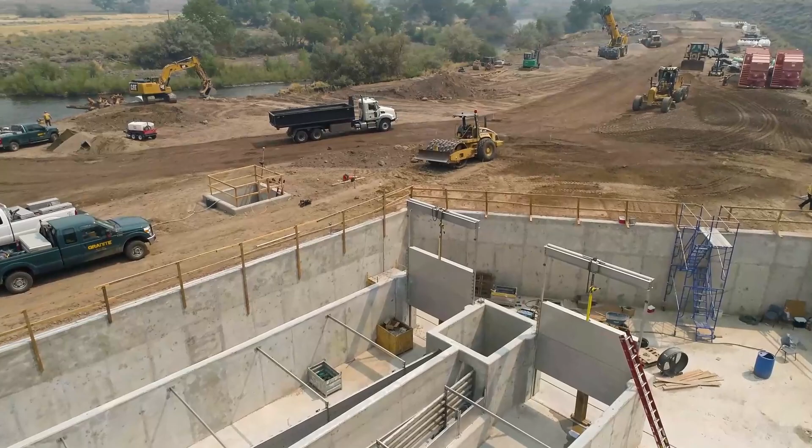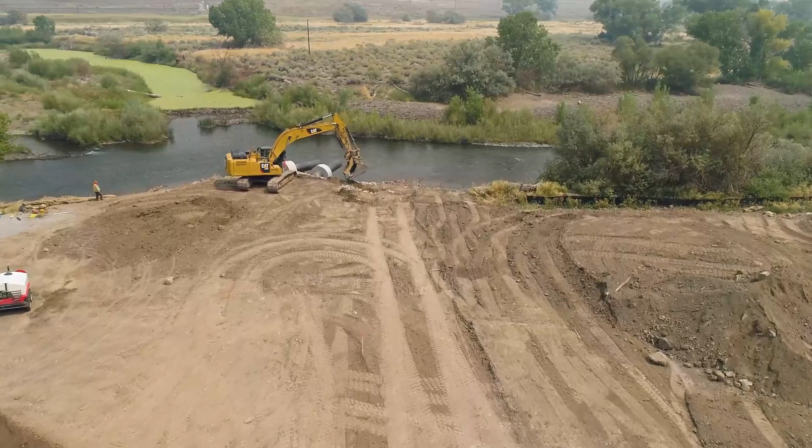Thank you for taking the time to watch Granite Construction's Safety and Environmental Policy Introduction video for subcontractors. In order to strengthen our commitment to safety, sustainability, and environmental integrity, this video will highlight how each and every one of us can do our part. This presentation will focus on the various environmental and safety procedures that you will be required to follow while on a Granite job site. If you have any questions about the presentation or the content, please contact Granite Construction's project management team.

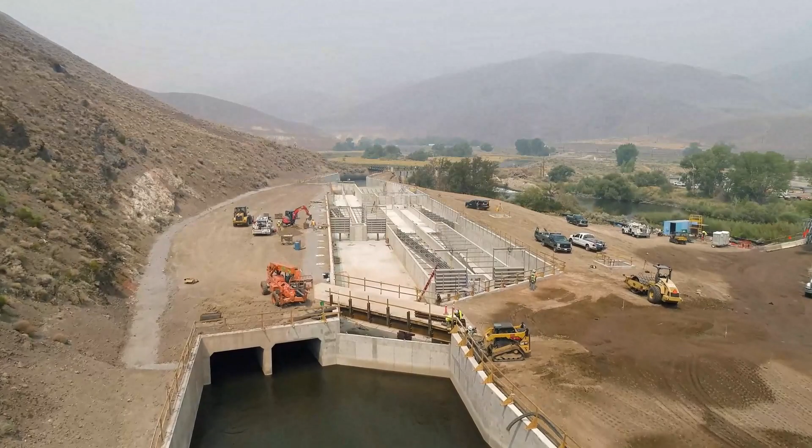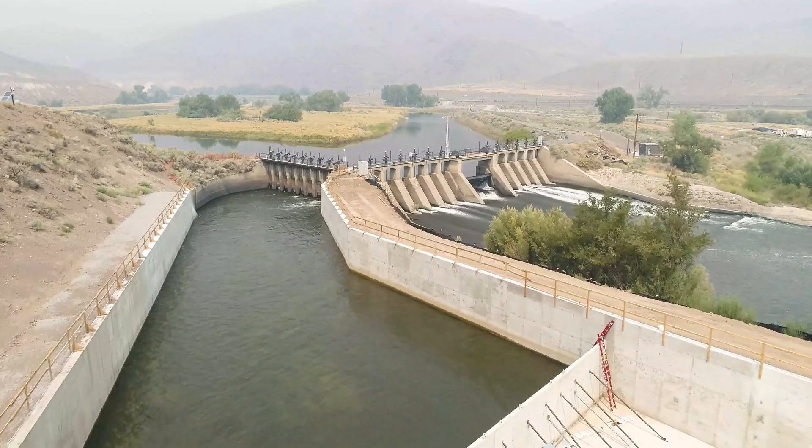Granite's Safety, Health, Environmental, and Quality Policy, also known as SHEQ, embodies our commitment to industry leadership by providing a safe workplace for employees and subcontractors, delivering on our environmental responsibilities, and providing quality products and services to our customers and the community. If you are unfamiliar or have questions about this policy, please take the time after this presentation to reach out to Granite's project team, as these standards represent Granite's core values.

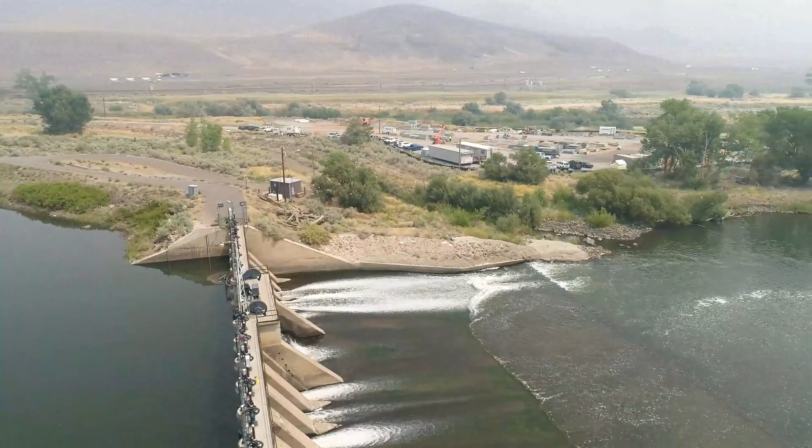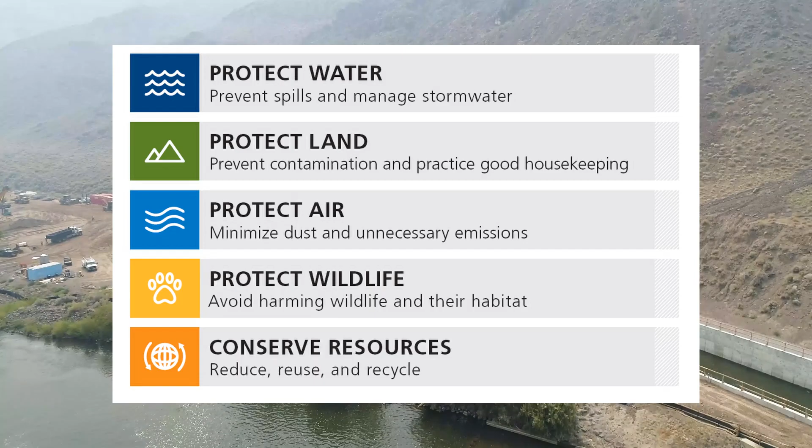All projects adhere to the Keep Granite Green policy to help identify and protect elements of the environment for which we can impact through our work activities. This video will focus on Granite's 5 environmental aspects: protecting water quality, protecting land, protecting air quality, protecting wildlife, and conservation of resources. If you are unfamiliar or have questions about this policy, please take time after this presentation to reach out to Granite's team.

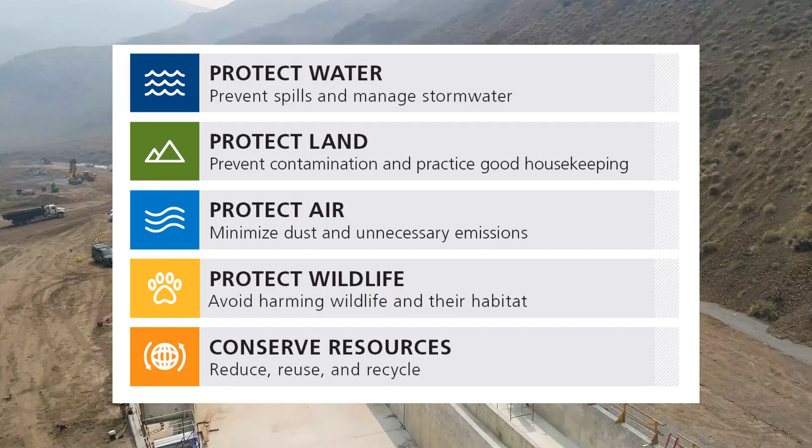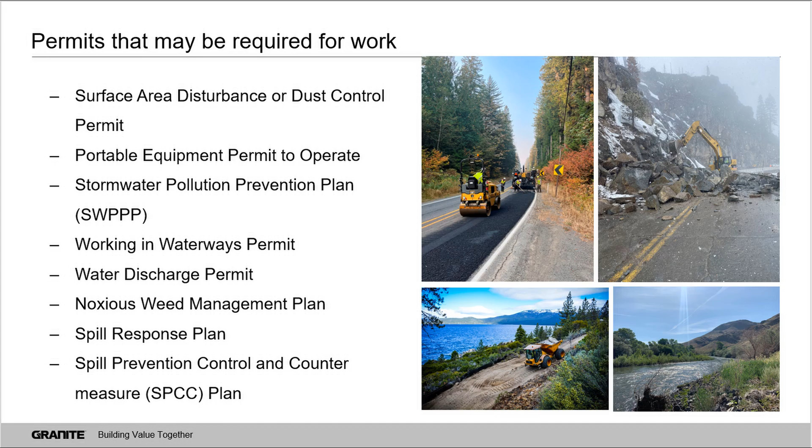Granite has various permits and plans issued by federal and local environmental regulatory agencies. These permits outline the requirements the site must comply with to prevent the potential negative impact a construction site could have on our environment. These permits and plans include, but are not limited to, all permits and plans that are required for the project are there to protect our environment. Ask the Granite project team about permits and plans that are specific to your project.

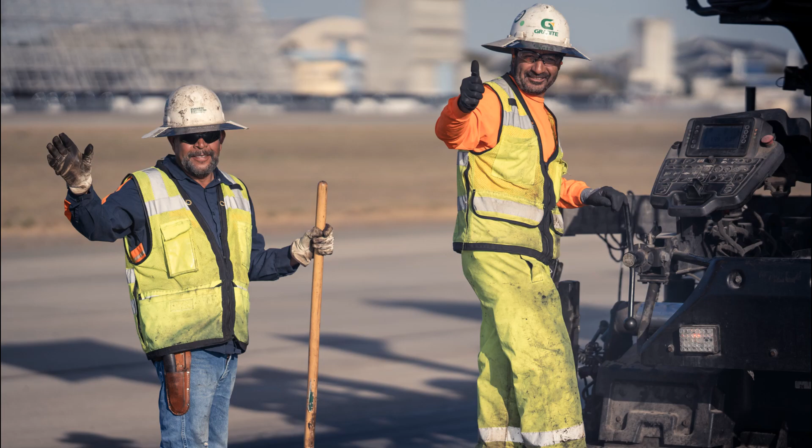Immediately notify Granite if a safety or environmental regulatory inspector arrives on the project. We ask that you please wait with the inspector until a Granite project member has taken over. Always be courteous to all site visitors, including the regulatory inspectors. It is a requirement to have 100% compliance of the project site and prevent adding any construction-related safety hazards or

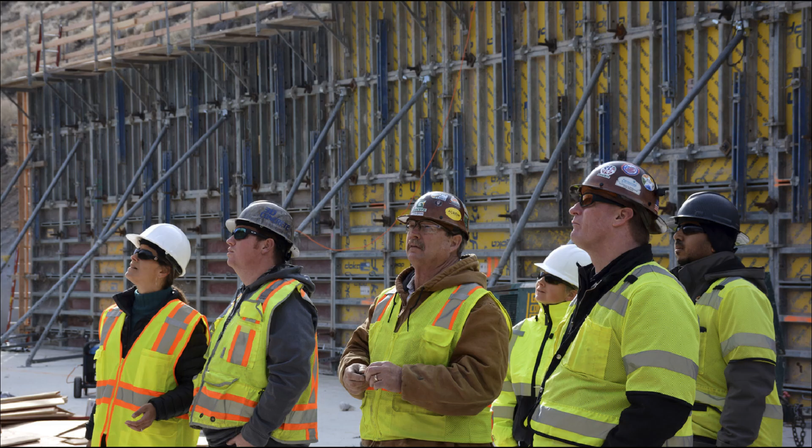pollutants into the air, ground, or local water sources. The safety hazards and pollutant parameters should be monitored closely during all construction activities. Here is a list of common pollutants found on construction sites. The required permits and best management practices, also known as BMPs, should prevent pollutants from air quality issues, contaminating ground

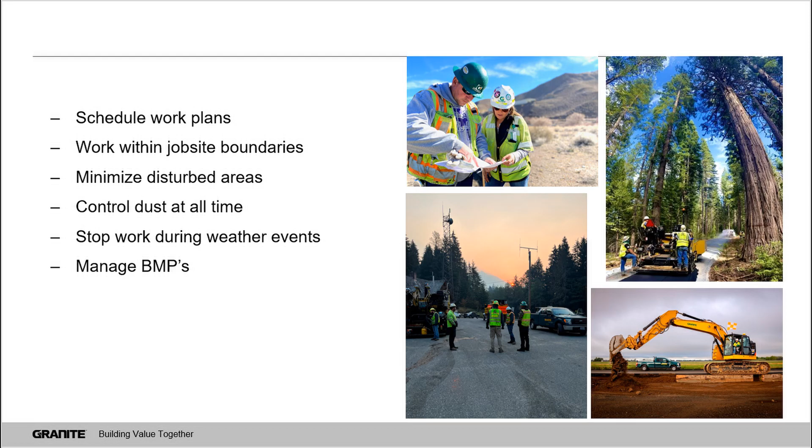soils, or impairing surface and groundwater. Common ways to prevent all of these pollutants from becoming an issue is to schedule and plan our work, work within the job site boundaries, minimize disturbance in order to preserve existing vegetation, provide adequate dust suppression for all activities performed, stopping work during high wind events, managing erosion and sediment controls, and engineer controls for unique challenges. With these few BMPs, we can greatly reduce and eliminate the potential impacts of construction activities to this area. If you see something that doesn't look right, please report it to the project team.

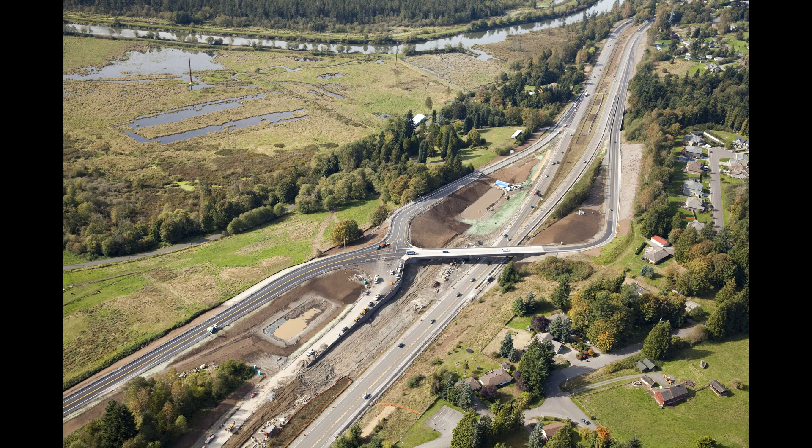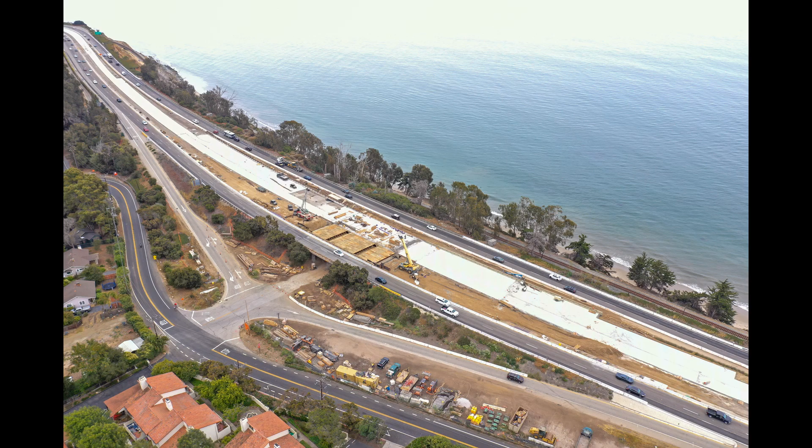Housekeeping is a crucial step in protecting the safety of our employees and the environment while maintaining job site compliance with federal and local regulations. Housekeeping should be addressed throughout the day, especially at the end of shift. Here are some good practices that help maintain good housekeeping.

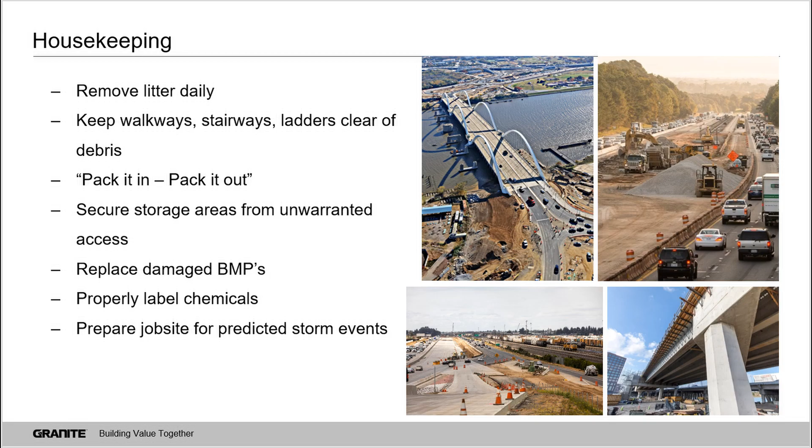Remove litter and keep walkways clear of debris. Use the pack it in, pack it out mentality. Secure storage areas from unwarranted access that helps prevent improper storage and vandalism. Repairing and replacing damaged BMPs. Proper chemical storage, labeling, and handling to help prevent spills, leaks, and other hazards. And preparing the job site for predicted rain events to prevent stormwater and pollutant discharges.

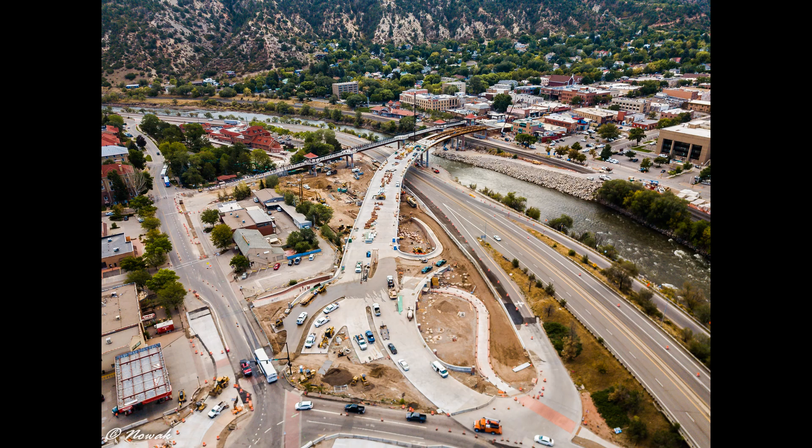Along with housekeeping, hazardous material and chemical storage is crucial in preventing spills and leaks. It is important to use all of the following BMPs to properly manage, store, and handle these materials during construction. Use secondary containment with all petroleum-based products and materials classified as hazardous. Keep these materials on a level surface far away from any body of water or storm drain.

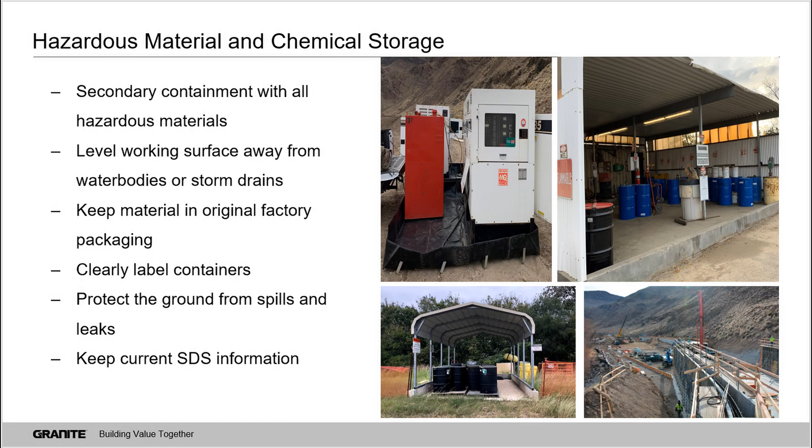Cover or relocate to proper storage before rain events. Keep materials in their original factory packaging or clearly label the container with the contents being stored. Practice good housekeeping in conexes and material storage areas. During equipment maintenance or material transfers, protect the ground with drip pans, plastic sheeting, or absorbent materials. Ensure spill cleanup materials such as spill kits are readily available in the event of a spill or leak. Keep up-to-date SDS information for the chemicals and hazardous materials and make sure Granite's project team is aware of what's being kept on site.

Understanding the spill response and reporting steps in the event of a leak or spill are important to properly clean up and accurately document the incident.

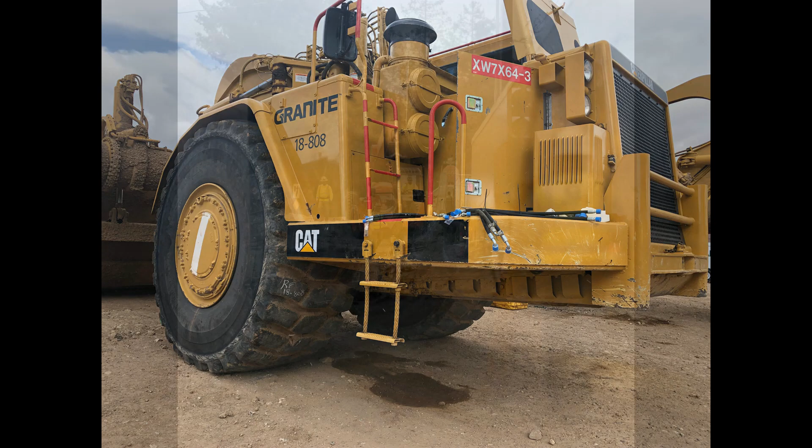When responding to the spill, make sure the area is safe to enter. If it is not safe, exit to a designated evacuation area and notify project personnel in the immediate area. If it is safe, then proceed with the cleanup procedure.

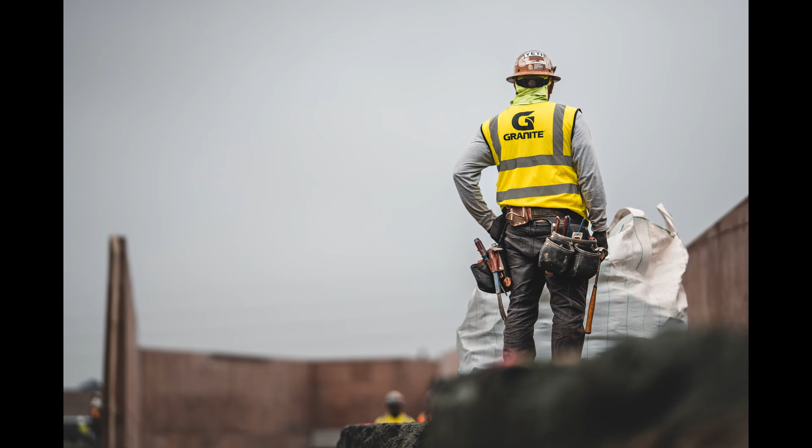Stop the spill or leak from continuing to discharge by turning off the source of the leak. Contain the spill using a spill kit or absorbent materials and keep it from spreading. Place contaminated soils and cleanup materials back into the spill kit.

When on a Granite project site, Granite has reporting authority to outside regulatory agencies. Project personnel should only be reporting spills to the Granite Construction Project Management Team.

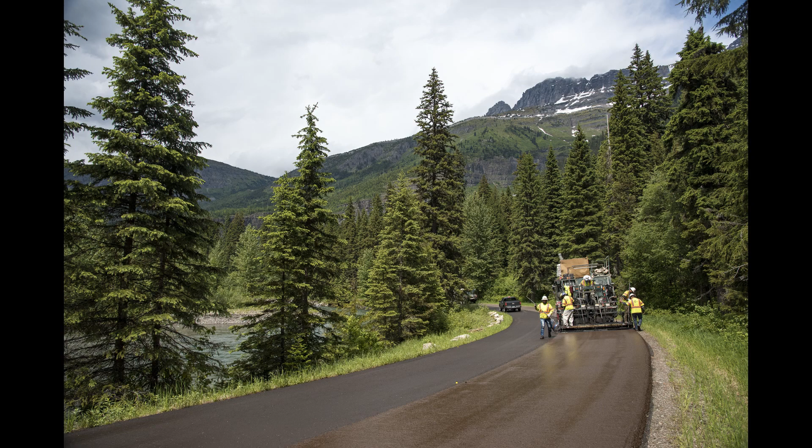Avoid contact with wildlife to minimize the negative impacts that construction activities might impose. Be aware there may be migratory birds, endangered or sensitive species on site. Do not remove or disturb any living animals, nests, dwellings, carcasses, bones, or remains from the site without approval from your supervisor.

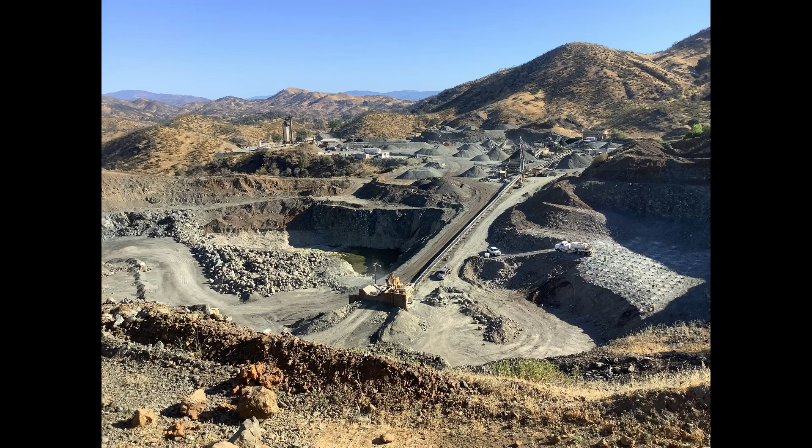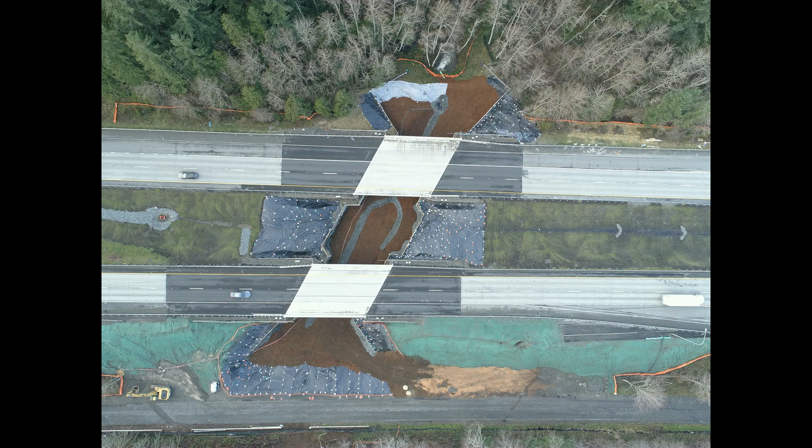Do not enter fenced-off areas without consulting the appropriate personnel. Any harm to species or their habitat will need to be reported immediately to the project team.

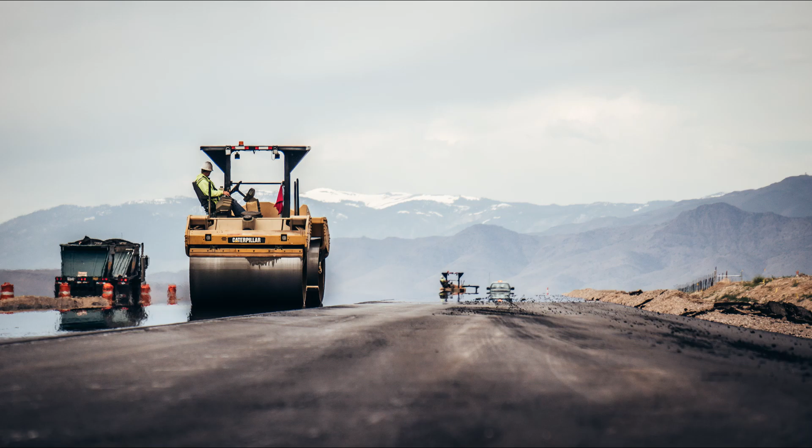Conserving resources should be considered on the project when looking for opportunities to reduce waste, reuse materials where possible, and recycle. Granite has a 5-minute idling policy for all heavy equipment and trucks.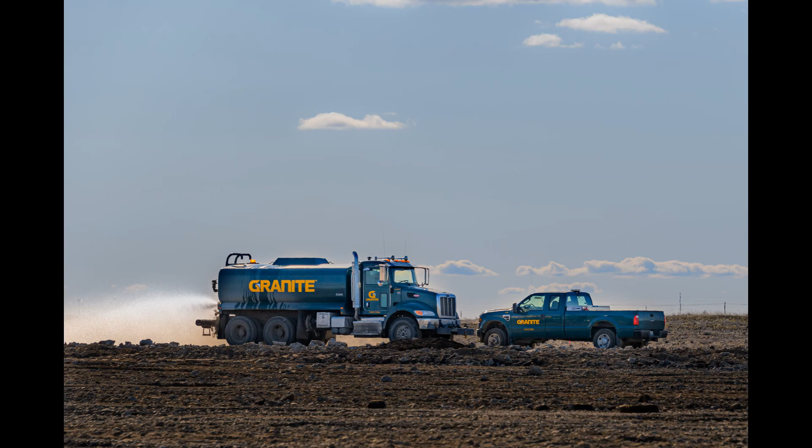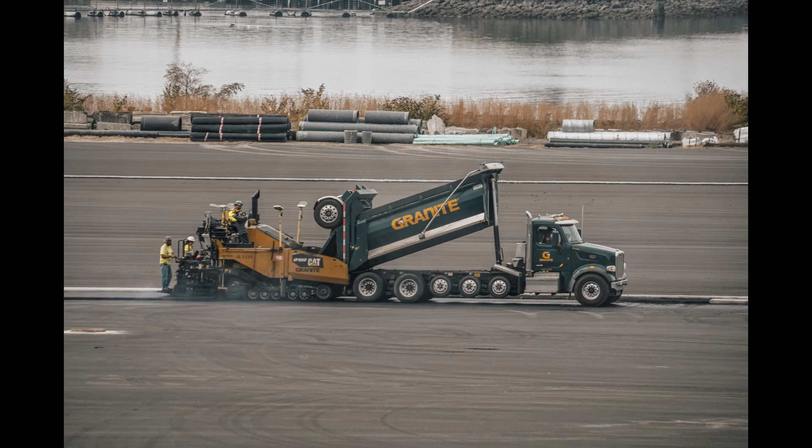This policy should be followed at all times except for when we're warming up or cooling down engines in severe climate conditions, when idling is essential to test, service, or repair an engine, and when providing a power source for equipment or operations. Limiting idling not only reduces the project's overall fuel cost, but it also reduces pollutants released into the air from fuel combustion.

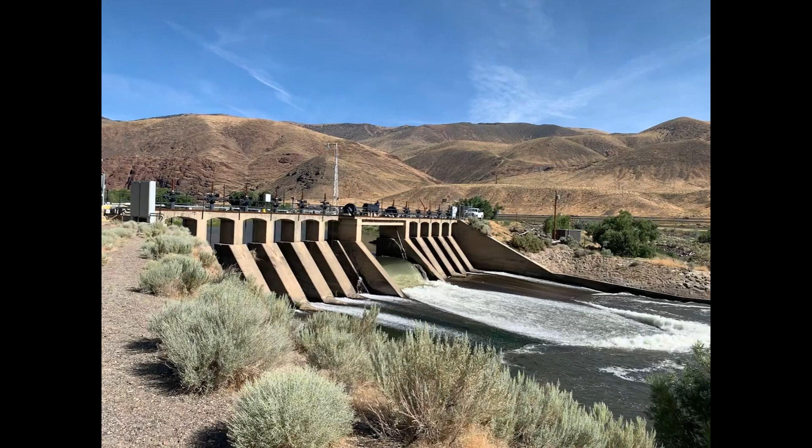Cultural resources are non-renewable and important to our history and understanding the past. There may be cultural resources on site which are not known. Please be aware during construction operations.

Federal and state laws protect Native American historical and paleontological resources. Do not disturb, collect, or move these resources. Know your project site boundary and do not drive, park, or stage equipment or materials in any unauthorized areas.

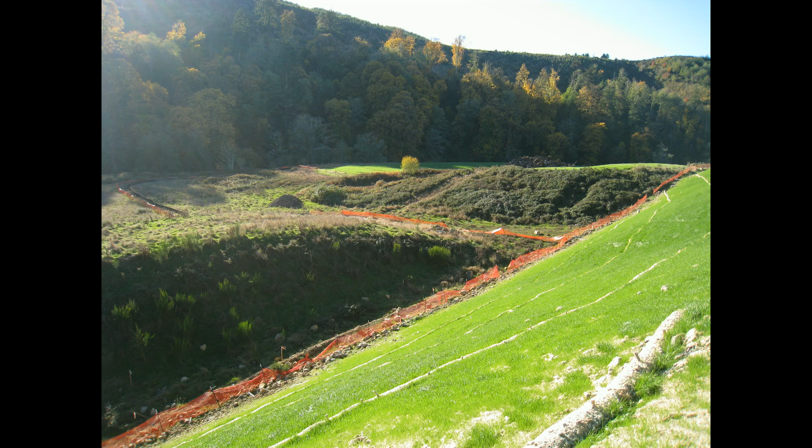Construction fencing is often used to protect resources from disturbance. Never remove or go around construction fencing without approval from your supervisor. Stop work if anything is discovered and notify the project team.

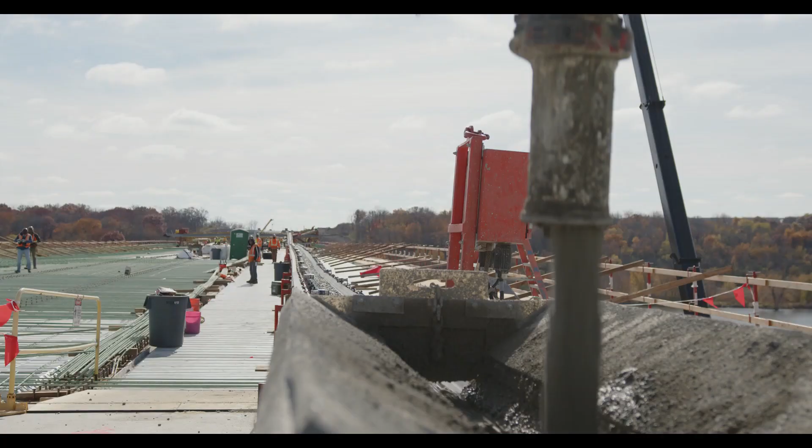Subcontractor management, employees, sub-tier trades, visitors, and suppliers will be given an on-site project-specific safety briefing prior to starting work on this project. The briefing shall cover at a minimum personal protective equipment requirements, job-specific hazards, traffic control, permit or plan requirements, and unauthorized areas at a minimum.

The subcontractor shall provide safety training to their employees and maintain documentation of such. Such training shall be in accordance with local, state, and federal requirements.

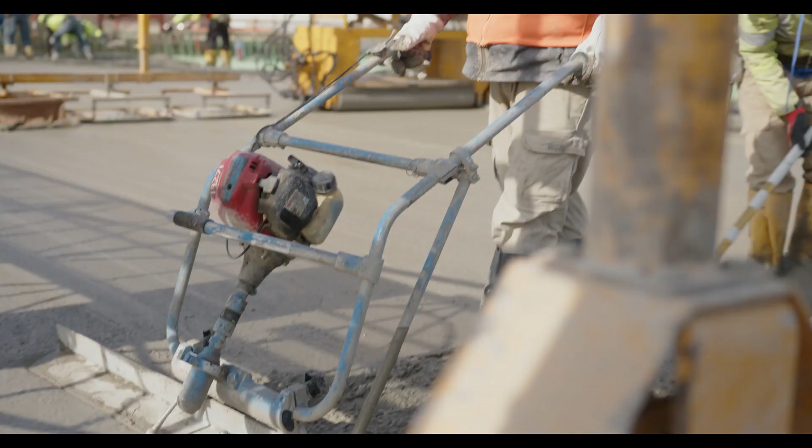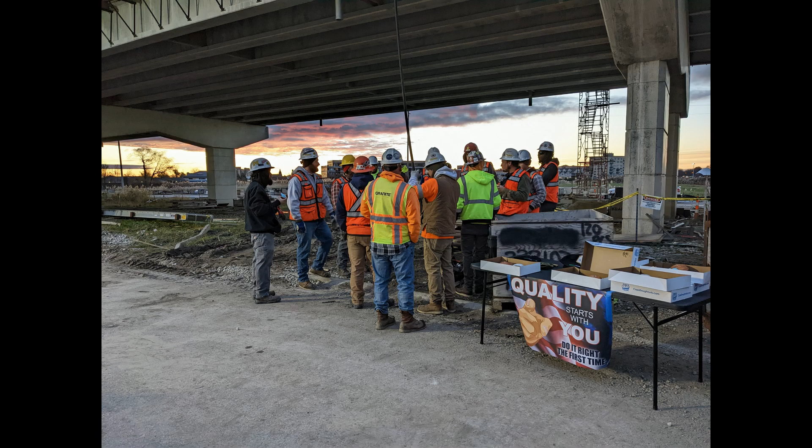Safety meetings are to be held by all subcontractors on a regular basis and must be conducted prior to the start of any new operation. These meetings should discuss the schedule of daily activities, tasks, potential hazards associated with the work, as well as necessary precautions and controls. Subcontractors are also encouraged to attend the job's morning safety meeting.

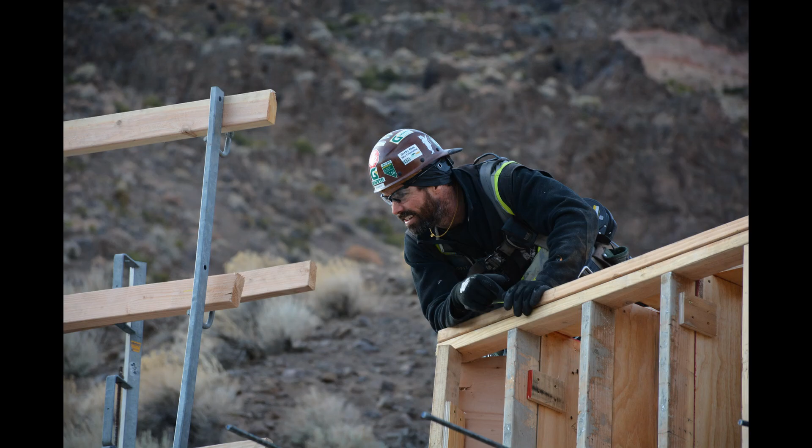Subcontractors are required to complete and document a daily safety inspection of their work areas. These inspections are to be completed by a competent person and must cover at a minimum inspections of all equipment.

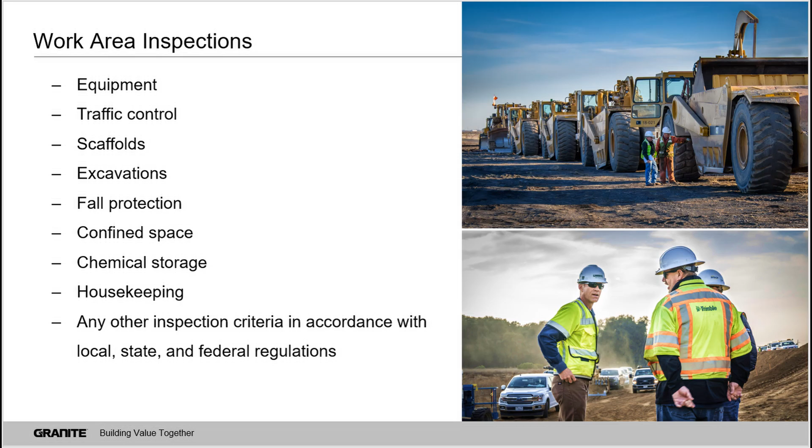Inspections must cover traffic control, scaffolds, excavations, fall protection, confined space, chemical storage areas, housekeeping, and any other inspection criteria in accordance with local, state, and federal regulations. Documentation of such inspections must be maintained and available upon request from a regulatory agency.

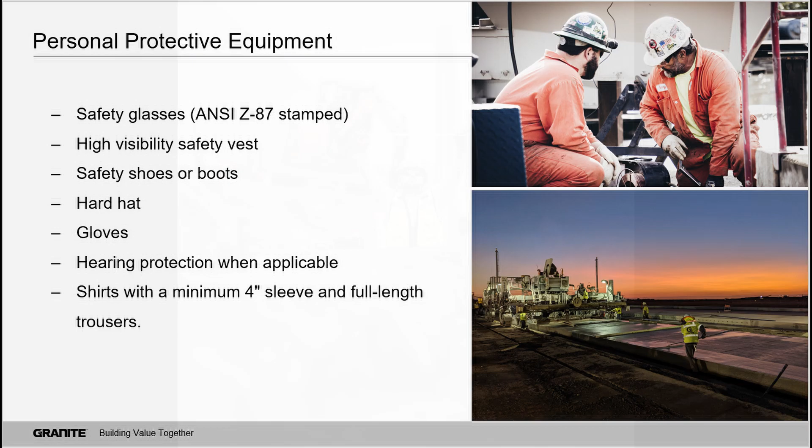Subcontractors, visitors, and delivery drivers present on any Granite project or material site are required to wear the basic PPE, including the following: safety glasses, appropriate high visibility safety vest, safety shoes or boots, hard hat, appropriate gloves while handling materials, hearing protection when applicable, shirts with a minimum 4-inch sleeve, and full-length trousers. Additionally, PPE must be appropriate size, functional, and maintained in good condition.

Additional PPE may be required for specific tasks. Refer to local, state, and federal regulations for additional information.

As a Granite subcontractor, you have the right and responsibility to use stop work authority whenever you see an unsafe act being performed. Watching out for your coworkers' safety, as well as your own, ensures that the job gets done correctly and we all get to go home safely.

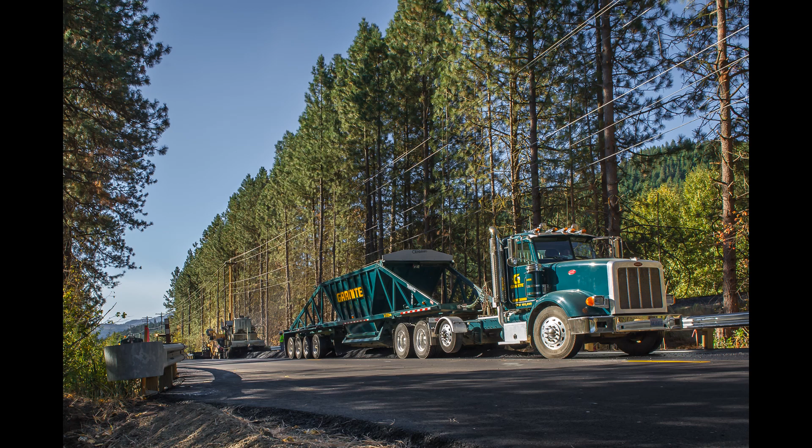All subcontractor company vehicles should have a visible company logo on at least 2 sides of their vehicles, be operated by those who hold a valid driver's license, be in safe working condition, and be equipped with an operational beacon in accordance with state, federal, and MUTCD requirements.

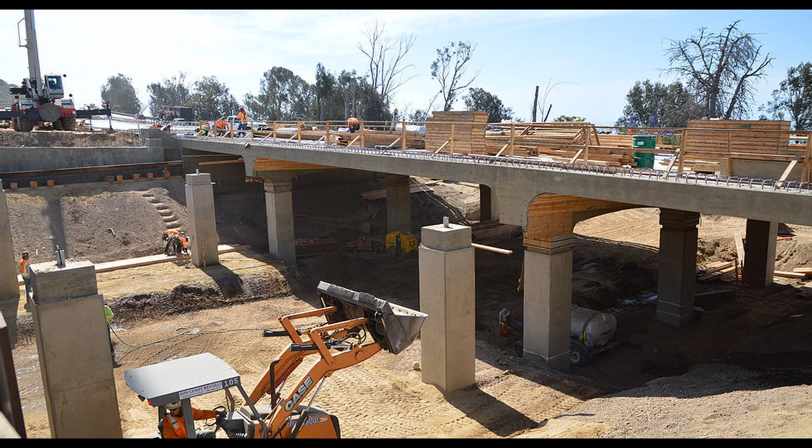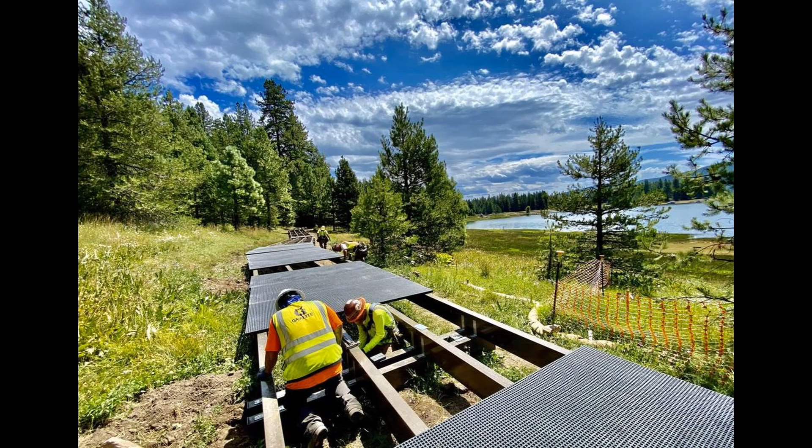Cell phone use when operating vehicles on Granite work sites is prohibited, and seat belts must be worn at all times. All hand and portable tools brought on site by the subcontractor shall be maintained in good, safe working condition, per the tool's manufacturer. If a tool is defective or is no longer in safe working condition, it must be removed from the job immediately.

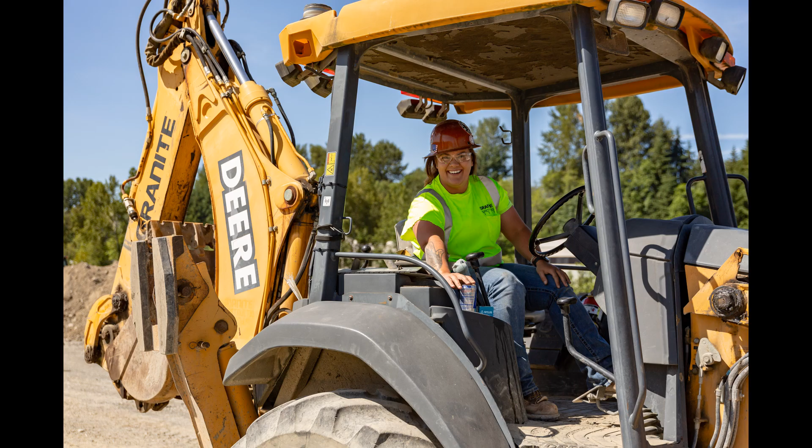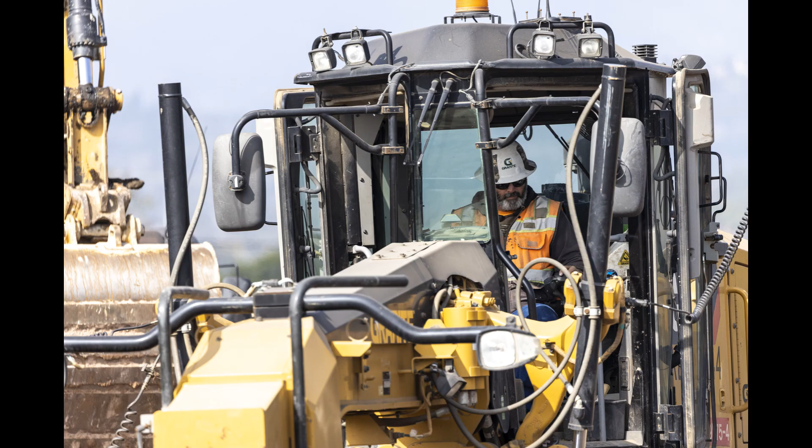All equipment brought on site by the subcontractor shall be maintained in good, safe working condition, operated by qualified personnel only, and inspected daily. If any safety devices on equipment are inoperable, that piece of equipment must be taken out of service until repaired. All subcontractors must maintain overhead power line clearances for mobile equipment. Refer to state, local, federal, and utility owner regulations for clearance distances.

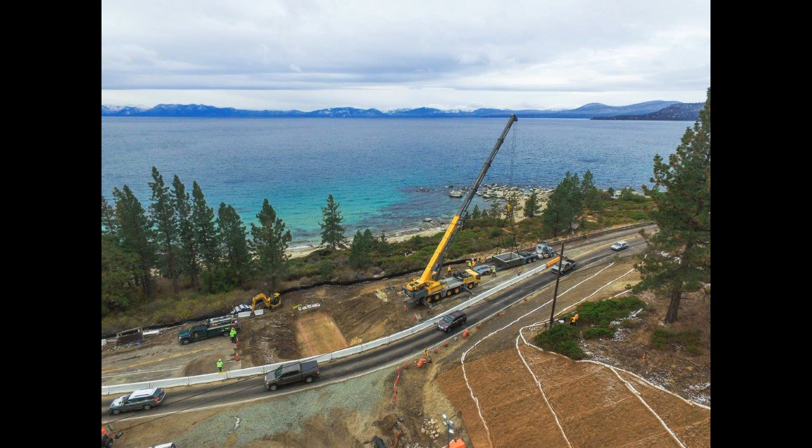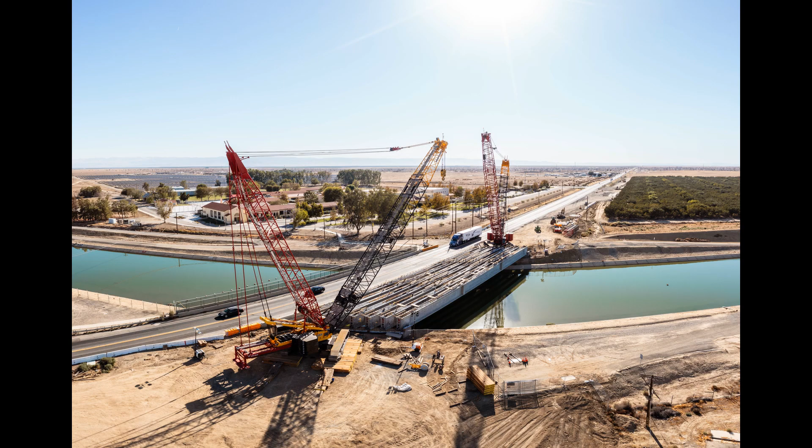When traffic control, also known as TC, is required, it shall be set and maintained by a certified TC supervisor and in accordance with the applicable project TC plans, local, and MUTCD requirements. All TC must be communicated to the Granite Project Management Team as soon as possible. Additionally, flaggers must be certified and maintain visual and/or radio contact in accordance with state and/or MUTCD requirements.

All subcontractor incidents, including first aid injuries, will be communicated to the project management team regardless of severity within 24 hours.

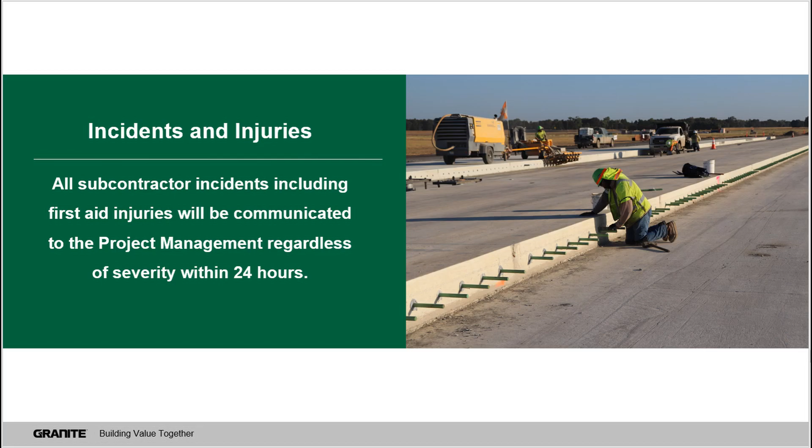Subcontractors are responsible for identifying local emergency response and communicating the plan to their employees. The subcontractor is also responsible for providing an adequate number of first aid and CPR trained personnel on the project.

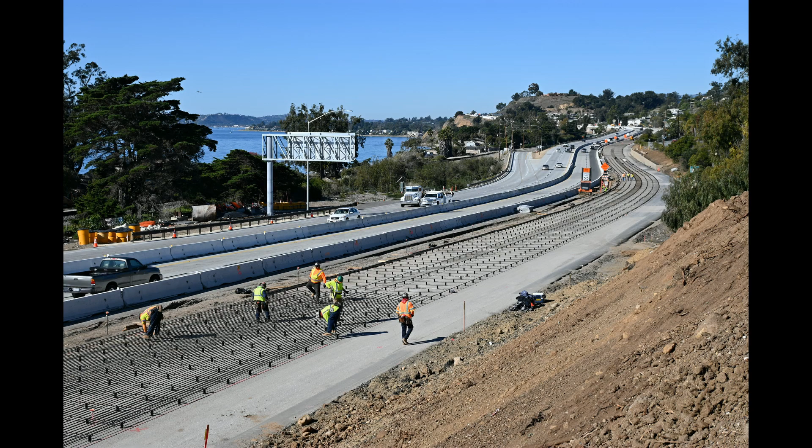The subcontractor is responsible for providing safe working conditions and procedures for their employees and others exposed to their work. Subcontractors shall have in place a written safety and health program that establishes the minimum safety and health management requirements for compliance with applicable regulations for the operations that they have been contracted to perform.

Subcontractor shall provide the names of its representatives who will be responsible for safety and health protection at the job site. Work within the scope of the subcontract must be performed in accordance with all applicable laws and regulations, the subcontractor safety and health program, and the contract specifications.

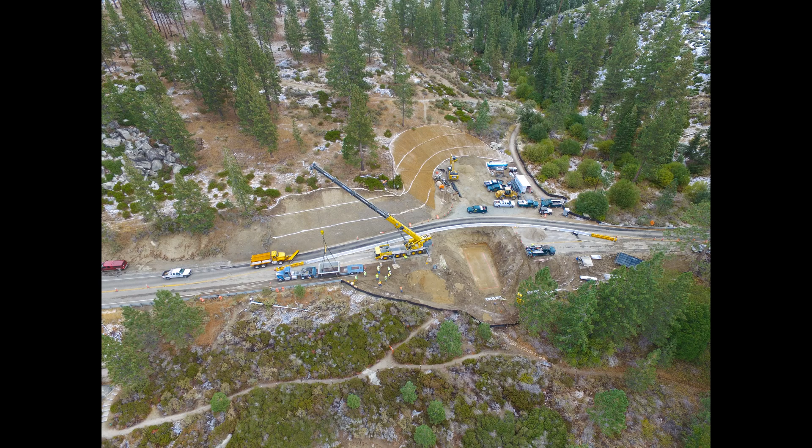Subcontractors shall notify Granite of any hazardous condition created by their operations. The subcontractor is encouraged to participate in safety meetings held by Granite when work within the scope of their subcontract is in progress.

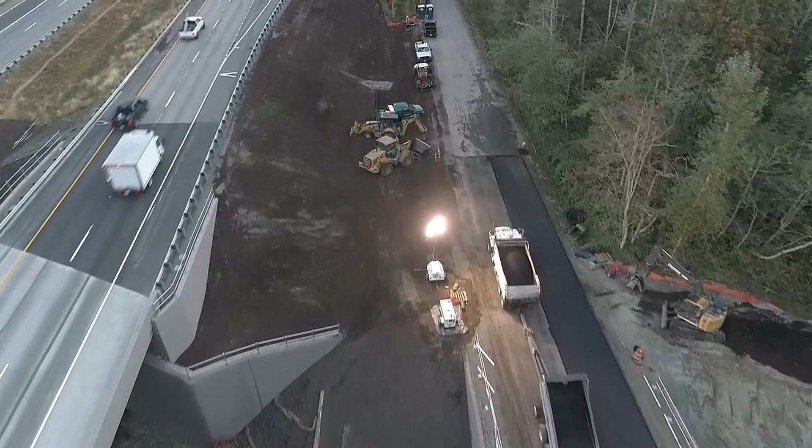Granite is committed to managing our safety and environmental responsibilities in all areas of our work. We protect our employees and the environment by complying with our project requirements and by taking into consideration how we can reduce our impacts to health, safety, and the environment.

As a recap, please notify your supervisor or the Granite Project Management Team immediately if you see stormwater, dust, or BMP issues, all spills or if any sheen is found on a body of water, housekeeping items or issues that just do not look right, permit questions or concerns.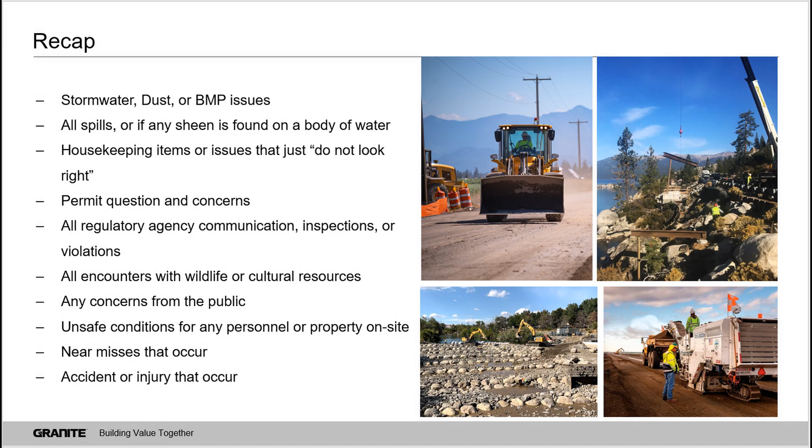All regulatory agency communication, inspections, or violations, all encounters with wildlife or cultural resources, any concerns from the public, unsafe conditions for any personnel or property on site, any near misses that occur, or any accident or injury that occurs.

Every employee has a right to stop work for environmental, safety, and quality issues. If you see poor job site conditions, stop work and notify your supervisor immediately.

Not following the safety and environmental job site requirements could result in a notice of violation and monetary penalties from federal and local agencies. Thank you for taking the time to watch Granite Construction's Safety and Environmental Policy Introduction video for subcontractors.